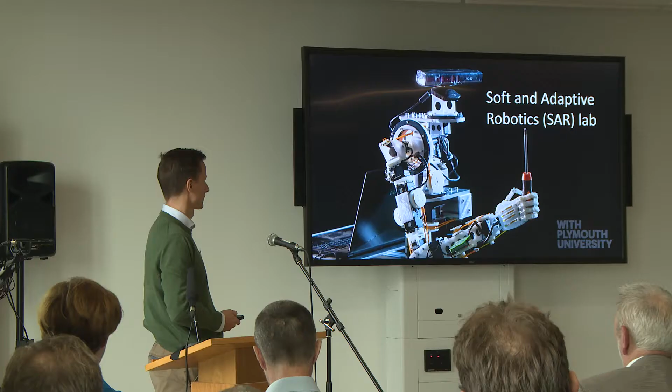So I'm here in two roles. I lead a small spin-out company called Fieldwork Robotics. I'll talk a little bit about that, but if anyone has interest, they can come and ask me later. That was spun out from the University of Plymouth, where I lead a lab called the Soft and Adaptive Robotics Lab. Across these two entities, as of this autumn, we have about 15 funded staff and students that I work with.

We develop what's called soft or variable stiffness robots for real-world applications. We started off doing research and education robots, sharing with other researchers around the world—there are institutions in Australia, South America, and Europe that replicated our designs. We made them open source, etc.

My real interest has always been the agricultural side, and I think agriculture has really come back into the limelight in terms of robotics in the last few years, because we can see that it's actually, compared to some of these other things we've been trying to do in hospitals or in homes, fairly easy comparatively. So compared to making me a meal and doing the dishes afterwards, picking a tomato seems easier.

In terms of funding, we had about 1.2 million pounds over the last 3-4 years. We have a good amount of funding to do this, and we focus on different tasks. We focus on 3 crops right now: one is raspberries—I'll get back to raspberries later—another is tomatoes, and the third one is cauliflower.

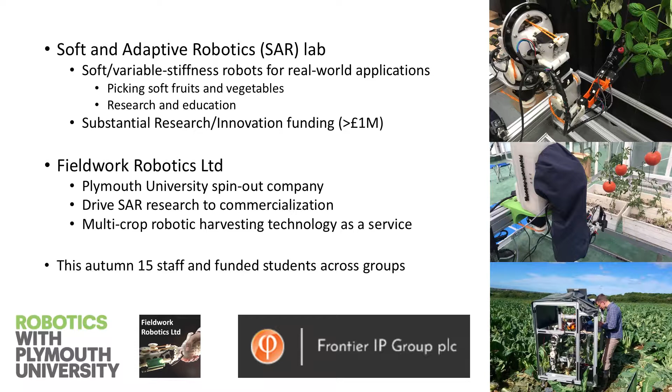Now people ask why in the world would you pick those? They seem very difficult. Raspberries are very complex, cauliflower is also very complex. One of the things we're looking at is, if you're growing a crop for 5, 6, 7 months of the year, what do you do with the robot the rest of the year? So can we look at things that are a little bit more multi-crop, universal technology that can be revamped and used the rest of the year somewhere else and on something else?

The second thing is, if you go talk to an investor to fund your spin-out company in agricultural robotics, they basically say, okay, if you can solve raspberries, then I'm confident you can also make something that later can pick strawberries or something like that. So there is this idea that maybe that's a good approach.

So we're looking at that, and we're looking at whether from the start this technology could be provided as a service to farmers, rather than having producers try to fund us to develop the technology, which is quite hard for you because margins are very tight, etc. We're trying to say, can we get interest from producers and then go out to private investment and see if they're interested.

Okay, so I'll just go through a few of the projects and a little bit about motivation, about why we do the things we do.

When we talk about selective harvesting in agriculture, we're talking about doing something we haven't done before in robotics: fast manipulation in close proximity to people, to obstacles, in a complex, dynamic environment, relying on sensory data compared to a factory, where you don't necessarily rely on a lot of sensory data to run your robot. It can be pre-programmed because everything is controlled.

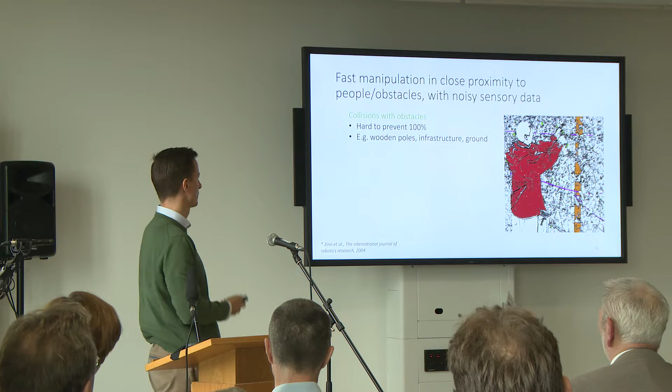You're worried about human co-workers. We imagine that robots will not just overnight replace workers. It'll be more like a gradual rollout, and in that case you'll be working alongside people, so you need to think about that aspect. And then entanglement, etc.

So basically, the short story is that we looked at how biological systems are built. Just like your arm, you have muscles that act in pairs, which means you can move, but also be stiff or loose. So if you have bad sensory data, you can hit something while your hand is soft and you don't break. If you stiffen up, then you can do surgery, or avoid collision with anything.

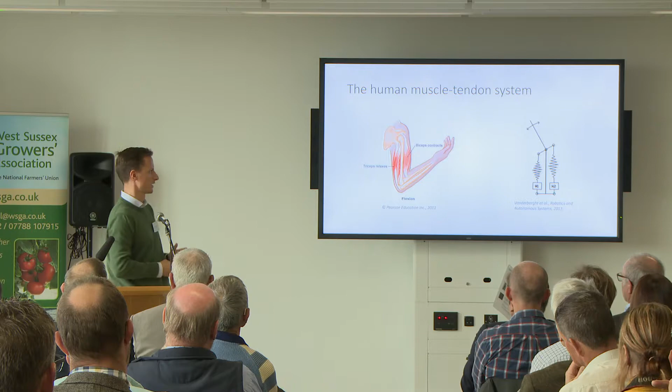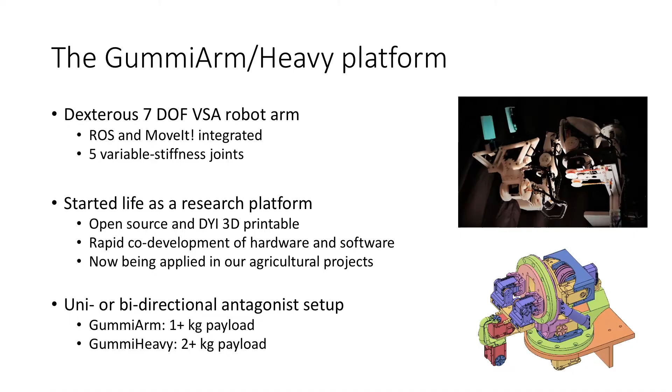So we try to take the same concept and put it into a robot arm. It's called a variable stiffness actuator, a variable stiffness robot. We designed a robot arm that started life as a research platform but was then moved into agriculture. We have different versions that can handle different payloads. The last one now can do a payload of 4 to 5 kilograms. One of the main points of this arm is that it can be robust.

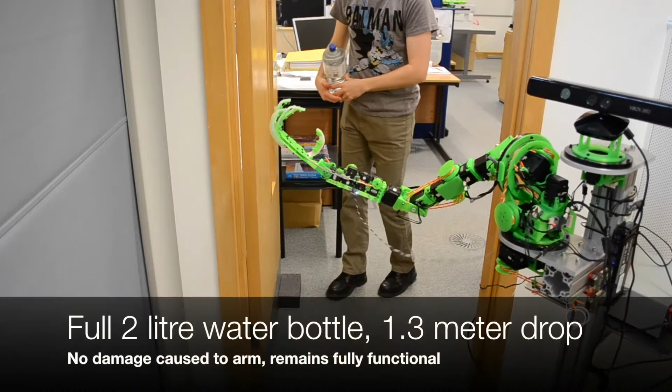This is an early test from a long time ago, just to show that if you have a soft or variable stiffness arm that can vary its softness, as it were, just like your arm, if you're in a soft configuration, you can take abuse.

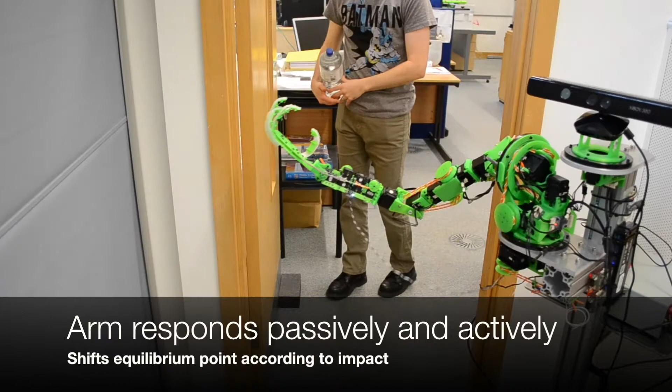This then led to some projects, and I'll go through those so you have an idea about what we've been working on. The first one was called the China Robot Harvest project, which we worked on in Shanghai, China. We work with one of the top engineering universities in China and a research and innovation platform there. We basically had 4 months to take this robot and modify it for agriculture. That sounds like a very short period of time because we never worked on tomatoes before.

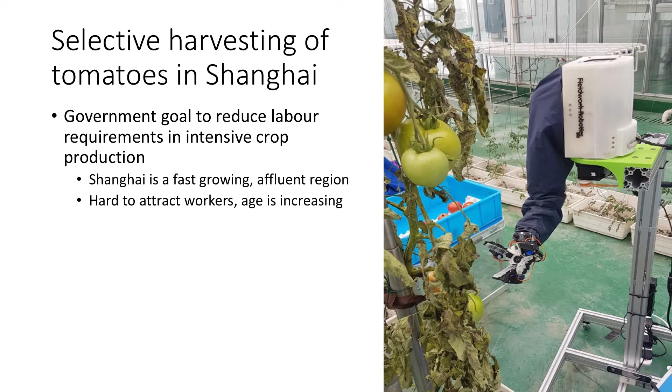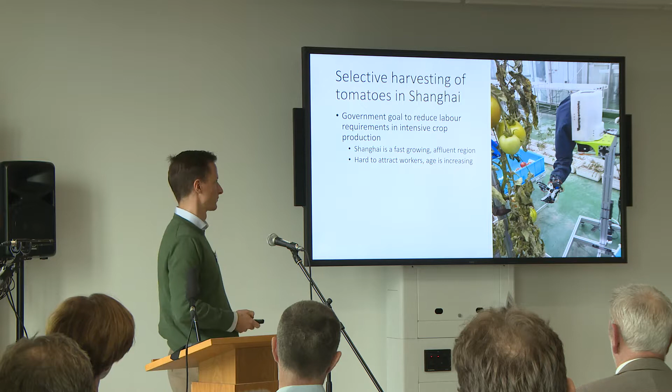But the whole concept behind this robot is also that it is largely 3D printable, so we're talking about lean manufacturing. We were trying to do some lean innovation here, exploiting rapid prototyping advances, for example, to quickly develop solutions to certain problems. So in 4 months we were able to go to Shanghai, China, and showcase that we could pick tomatoes at a very crude level, at least.

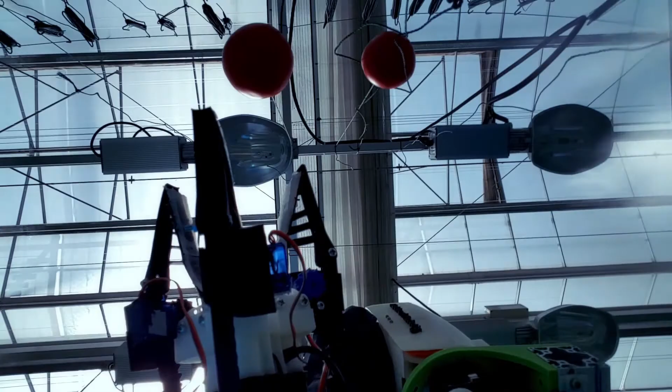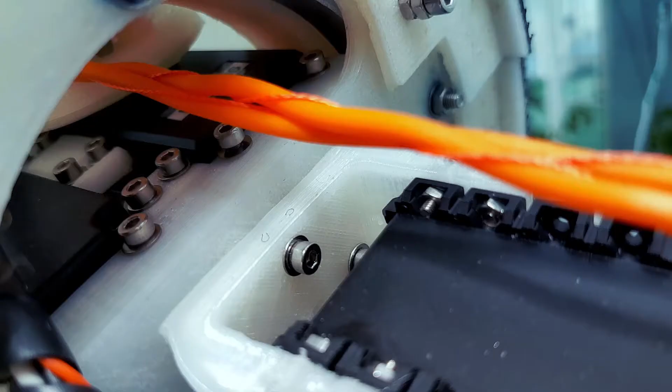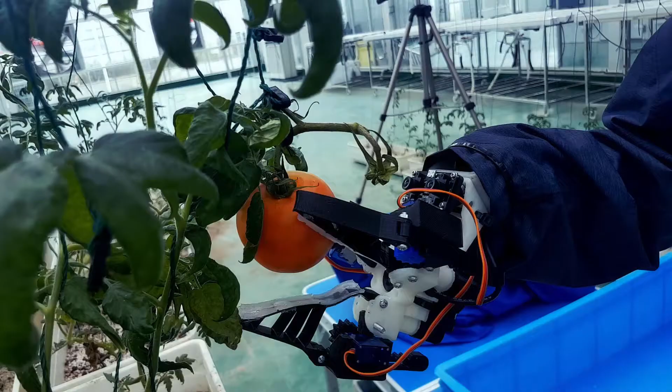So the technology itself is based on rapid prototyping, just so we can develop new approaches quickly. We can adapt to the variety in the crop that exists, and then we use a set of sensors ranging from extremely accurate tactile sensors, 3D sensors, cameras, etc. One of the key points we really wanted to show was that we could handle tomatoes gently enough. In China, they wanted us to pick it straight off the bush without cutting, but that it was actually strong enough to do that.

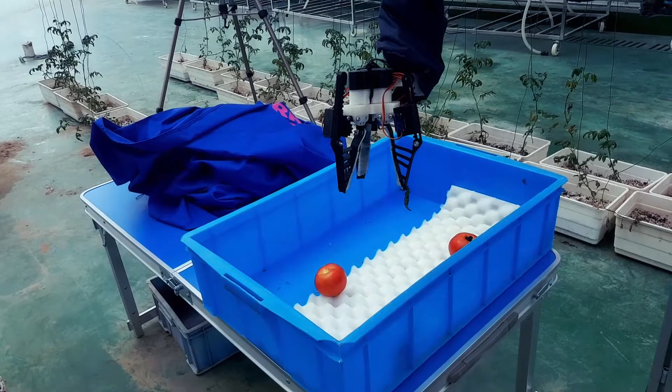We shouldn't do that, we shouldn't have - we didn't have time to do that. Anyway, this was about 2 years ago, so it was the first time we really were picking something in a relatively realistic scenario. You can see the tomatoes hanging from strings because it was out of tomato season in China, but we're going back in January.

Well, I'll leave it there.

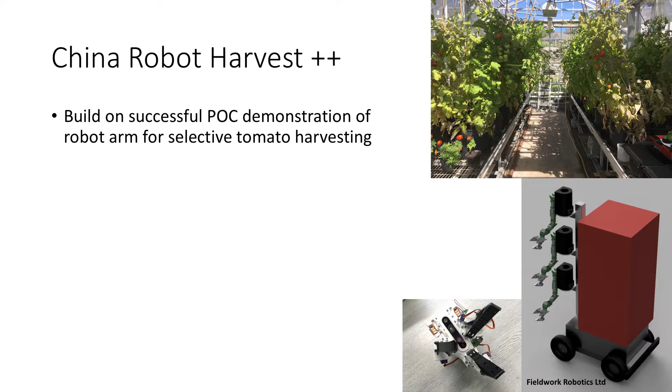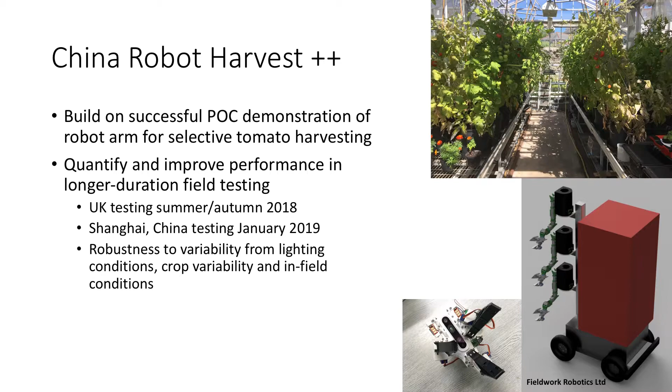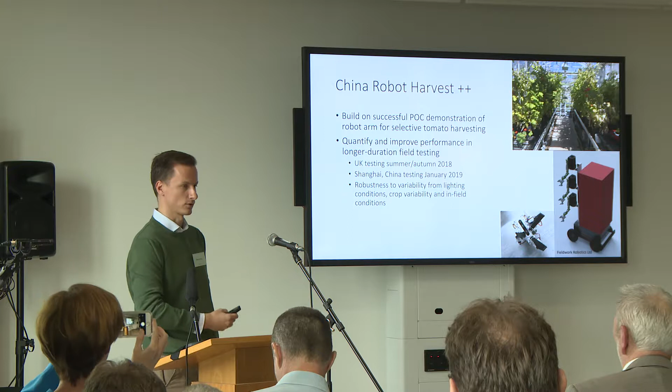As I said, we're continuing on this ongoing research project. We're growing tomatoes in our greenhouse on campus in Plymouth right now, and we're going back to China and Shanghai to showcase the new version. What we want to do is move towards a commercialization plan for a full platform, with multiple robot arms on it. If there are any tomato producers in the room, we're interested in talking to UK producers, because when this project finishes in China, we also want to look at this in Europe.

The other application we're quite keen on is raspberries. This is just a lab demo from earlier this year in spring, when there were no raspberries out in the field, and we were showcasing how we approach raspberries.

It's the same type of robot technology. It can be soft when it moves quickly, and stiffen up to be precise. In this case it has a different end effector able to pick raspberries to a certain degree, with good enough touch sensing and finger pads to handle them without damage. It has several vision systems that pick out targets, and we're now moving towards being able to grade them. This looks quite crude, and it takes about 12 seconds to pick a raspberry. If we compare it to a person, it's not quite there yet, but it's interesting.

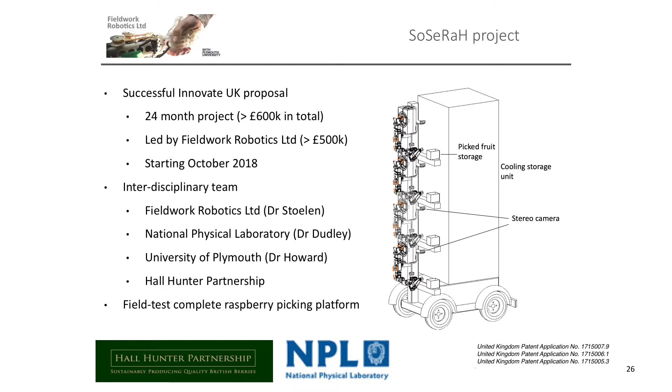That's why we work closely with, for example, Hall Hunter Partnership, which has big facilities here in Chichester. We signed a collaboration agreement with them, and we'll be working with them over the next 2 years to develop this technology further. You just saw a little video of the identification of raspberries, which we're progressing on quite rapidly, so we're able to do that part quite well. This also just got funded by Innovate UK grants, so we've got 2 years to work with the National Physical Laboratory, University of Plymouth, and Hall Hunter to develop this towards a full platform. We're hoping within the next 2 years we'll have something to showcase.

The last project I'll mention is that we're working with European Regional Development Funding for Cornwall to look at Brassica harvesting. We went for cauliflowers, working with Riviera Produce, a big Cornish producer. CNC Design and Teagle are strategic partners.

This case is a more recent project, but we are out in the field a lot. We're growing cauliflowers on campus, and looking at the hard part, which is figuring out whether these cauliflowers are mature or not. We're developing robotic platforms like this one. You can see it's early stage, but we're developing a bimanual platform with 2 robotic arms able to cut and pick cauliflower, at least the summer varieties for now, since they don't close up as much as winter and autumn varieties.

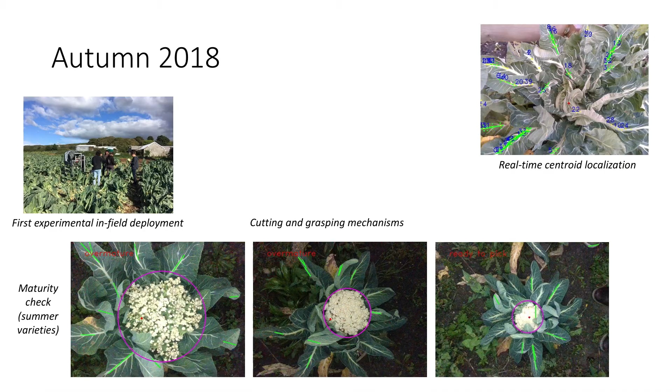The latest news is that we're working on the vision systems. We're out in the field, trying to prepare for next spring. In terms of cutting and grasping mechanisms, that's something I can't show here because we're looking to do patents on it. But it is perfectly possible to have robot arms that both pick and cut these cauliflowers quite rapidly. And that's it for me. I think that's the time ahead. Thank you.